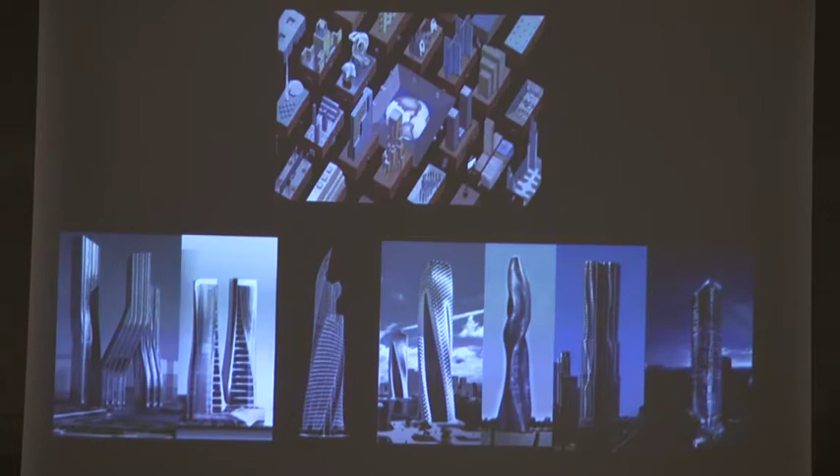We had a short conversation earlier on about Istanbul. Istanbul is now in the construction phase on steroids. Go there, have a look around. You can get a very interesting idea about all sorts of different models of architecture being executed today. Try and see what the qualitative differences are. It's scary, actually.

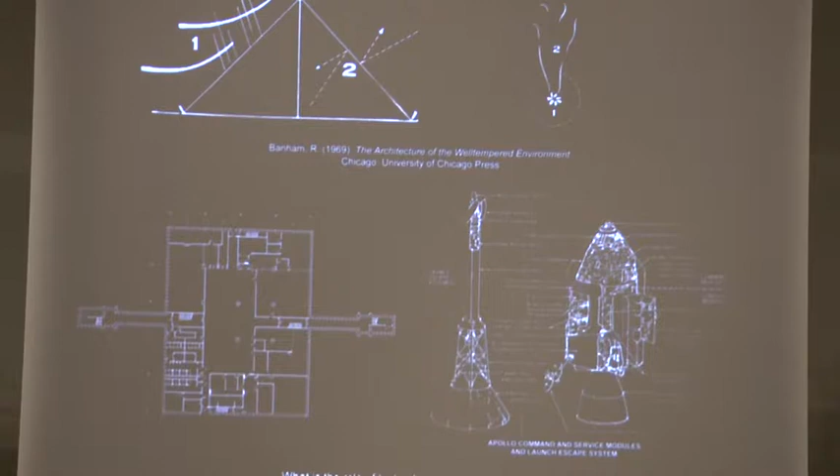Then the question is, if we confront issues such as sustainability and so on, and our tendency to solve such issues technologically, predominantly, why do we do that? Why don't we approach these problems from a spatial and material point of view more predominantly than with technology? One should think technology is what does the last bit that architecture can't do. But today, architecture does a bit and technology does the rest. That is a kind of weird proportioning to me, because I ask them: what do we really do as architects? Do we stuff architecture with technology, or do we try to offset something in the design? How do we do it? And where do these things come from?

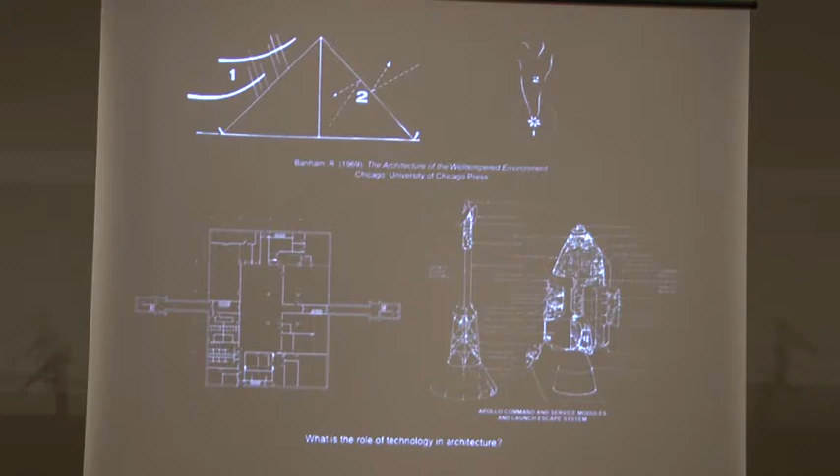Why do we have these very strict singular divisions between interior and exterior that need to be reorchestrated in their exchange with the environment through technology, because it's no longer done spatially?

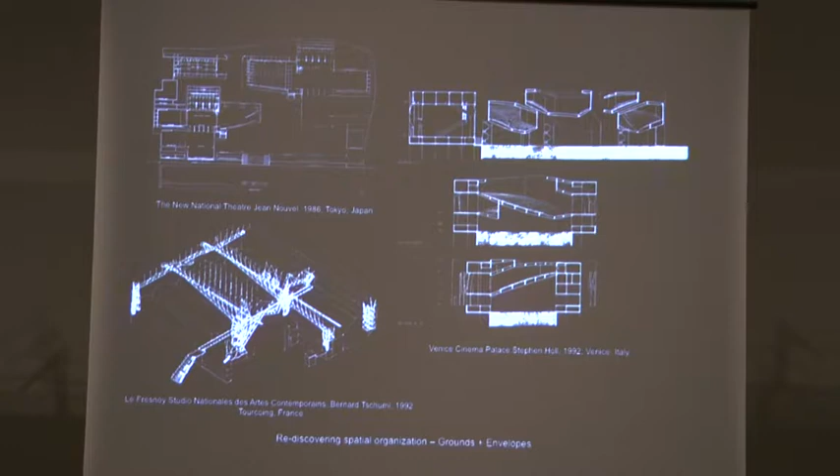But not all is lost. If one looks around, there are always, time and again, very interesting projects that suggest that somehow the core matter of architecture—the spatial material organization, the envelope, the ground, the relation of the building to its immediate context, also meaning the local physical environment—can be thought of in different ways. A lot of architects in their portfolios surely have a number of projects, reasonably less, but still there, that are worth re-examining for this kind of reason and purpose.

So I stepped out of practice around the year 2000. I had enough of it—this kind of Dr. Jekyll, Mr. Hyde, pretending at the AA that we can do all this funky stuff while at the same time not being able to turn this into projects. So I thought maybe a little break from practice, in order then to see how you gradually inchworm your way forward to retain some of the qualities and things that you are interested in.

So I would say most of my collaborative efforts with my colleagues are chiefly placed in the domain of research. There are three contexts in which this takes place: Ocean, a highly interdisciplinary research environment where we do partly very strange things; the Sustainable Environment Association, where we currently analyze 50 case studies of pre-industrial buildings to see how integrated spatial and material solutions could be drawn from there and updated—I'll show some examples in a second; and of course the Research Center for Architecture and Tectonics at the Oslo School of Architecture, where we experiment through construction and, as it were, the simulation of practice in an educational environment.

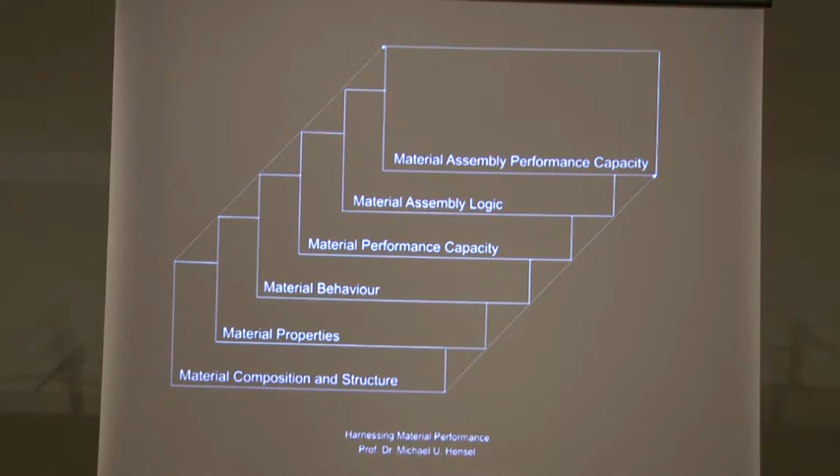Let me first start with material capacities on a smaller scale. It is very obvious to everybody who studies architecture that the properties of a material stem from its composition and structure. And the moment you put a material into a dynamic environment, it will behave - for instance, thermal length changes due to temperature changes and so on. If this behavior was harnessed and put to task for design, then we could talk about material performance.

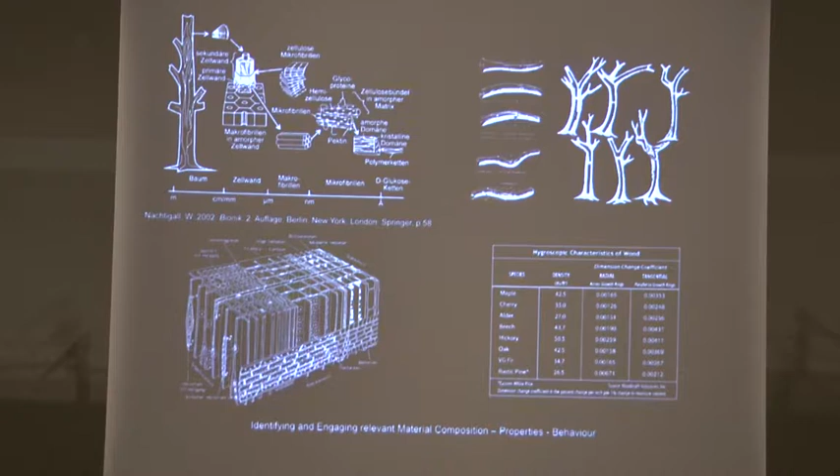But if we take a simple material, or not so simple, like wood, what do we really need to know about this material? How far do we need to go? If you truly want to harness material capacity and material performance, you really need to make yourself quite a range of sources that you need to look at, and they quite often bring together contemporary scientific knowledge and also contemporary fabrication methods, because those methods alter quite drastically materials.

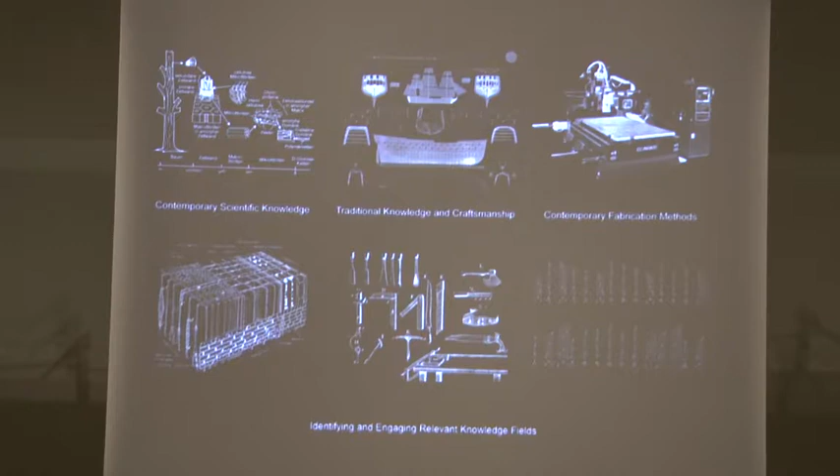If you think, for instance, about using a saw on wood, you destroy the fiber, so something quite radical happens. But there's one thing we should not forget about, and that is traditional knowledge and craftsmanship. For instance, in the case of Norway, where I'm currently working, this is really still an alive tradition, and people there have an incredible knowledge about how you pick one piece of wood versus another for a particular task. Where this knowledge is no longer in existence, the only way forward is extensive experimentation. In other words, you need to work with the material in the field of its behavior that you're interested in.

With materials like wood, you have also the luxury to look a little bit at wooden materials that are natural and how they behave. For instance, the seed pod that cracks open by virtue of moisture loss, which causes a twisting of the two halves of the seed pod that will then crack away from one another. This is caused by fiber directions in layers in opposite directions. So for instance, if you were to make a laminate, instead of saying you need to stabilize the laminate so that it doesn't curve, you do the exact opposite. You wet the laminate and you dry it, it will actually acquire curvature. It will do what wood naturally does, it will twist and warp and do its thing. If you do enough research in this manner, you can do it in a very controlled way. So all of a sudden you don't need to mill, or you don't need to build massive molds or formworks for this kind of panel to have this form.

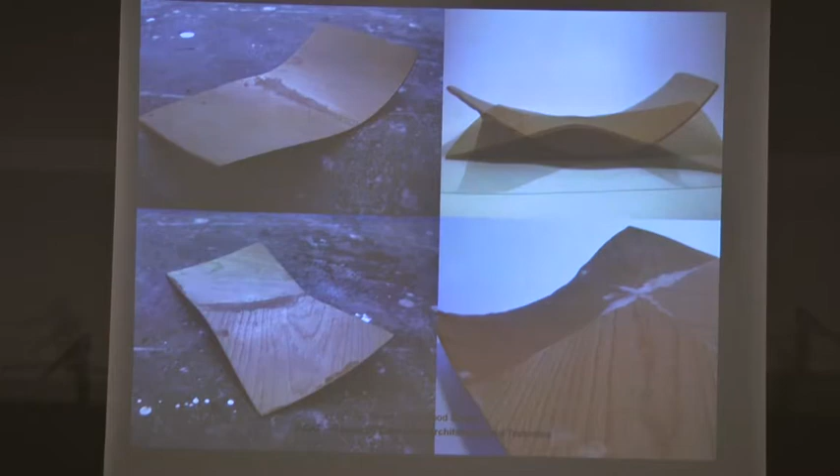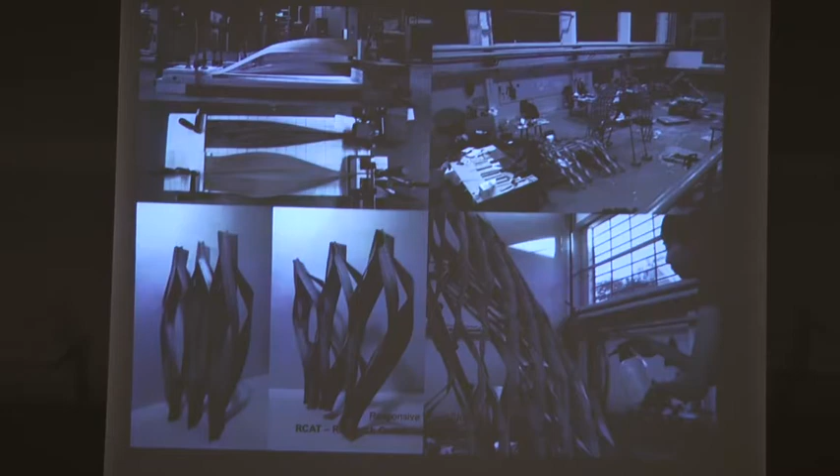So, on the one hand, you want to do enough physical material testing in order to be able to work forward in the digital domain and to produce the construction information. On the other hand, all of a sudden you need to pay attention to other things. If the wood indeed needs to be kept relatively wet during the construction process, you need to see, for instance, when you assemble in the exterior, where the sun is acting the most on that structure, because these are the areas you need to wet the most. So all of a sudden, environmental analysis becomes quite important, also for the assembly process.

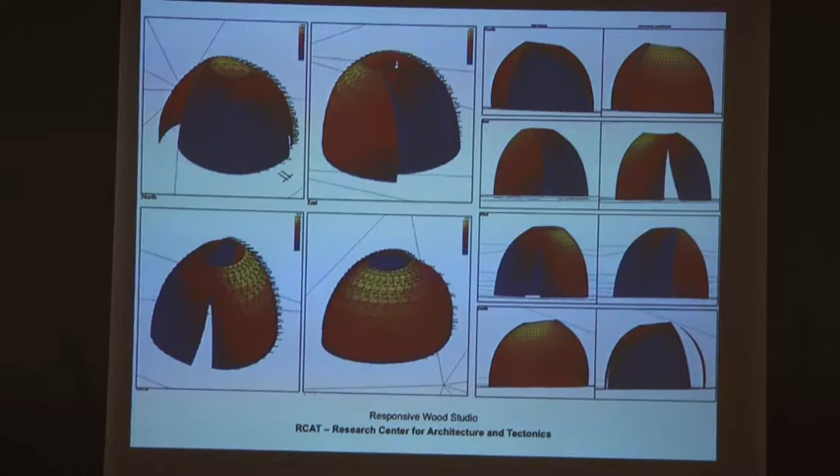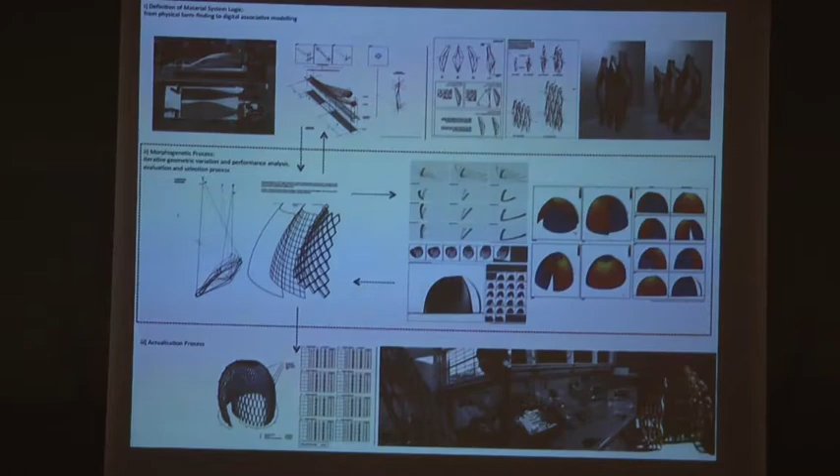I will not pester you with this for too long, because a lot of people are now working in this kind of way. I just wanted to show you one example of what I mean by utilizing material behavior. In fact, it is possible to build a structure out of 0.75 millimeter thin pine veneer due to the fact that the material behaves in drying and pre-tensions the entire structure.

Now, this exchange with the environment in the case of wood is called hygroscopic behavior. Wood seeks for moisture equilibrium with the environment. In other words, if there's greater ambient humidity, the wood will take in this humidity until there's equilibrium, and when it gets more dry outside, it will give that moisture off again. You can see here a photo that my wife took last year. It's a kind of wooden frame in our house that was rained on all night long and then hit the sun the next morning. It's actually quite a visible vapor there.

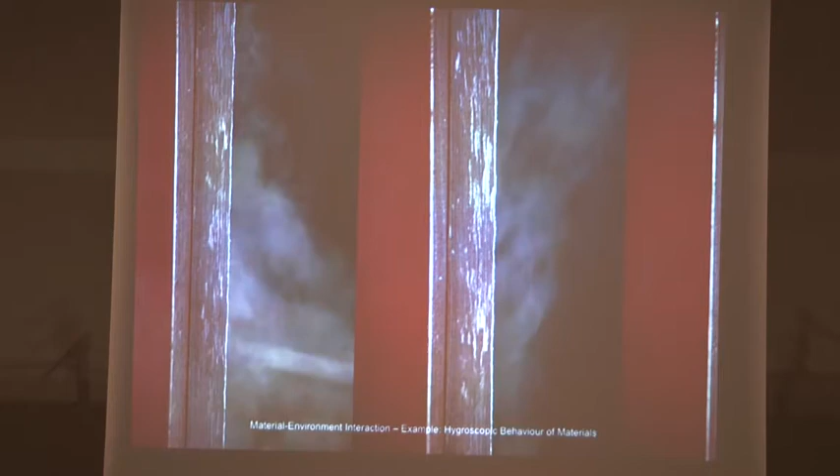That made me think that a blur building can actually be accomplished not necessarily by technological means, but by knowing exactly how you distribute mass and material in the environment. So if you truly want a blur building, of course you have the issue that you may not always have the blur when you want it. It will be there when the moisture is there, but that is a way of getting there. In a way, you can put the material to task.

And maybe here I will just refer one more time to an earlier statement. Why do we first look for a technical solution if, as architects, we should be more inclined to look for a spatial and material solution before we enhance those things that cannot happen in this way with technology?

Now, one thing is also quite interesting in the research that we're doing in Oslo. We have actually realized that we can do any amount of research in the School of Architecture, and yet that research will never make itself out into practice and into the built environment.

Why? First of all, because we can't obtain any great variety of wood, because the two predominant species in Scandinavia today are pine and spruce. So if you want broadleaf wood, you already have some difficulties to acquire it.

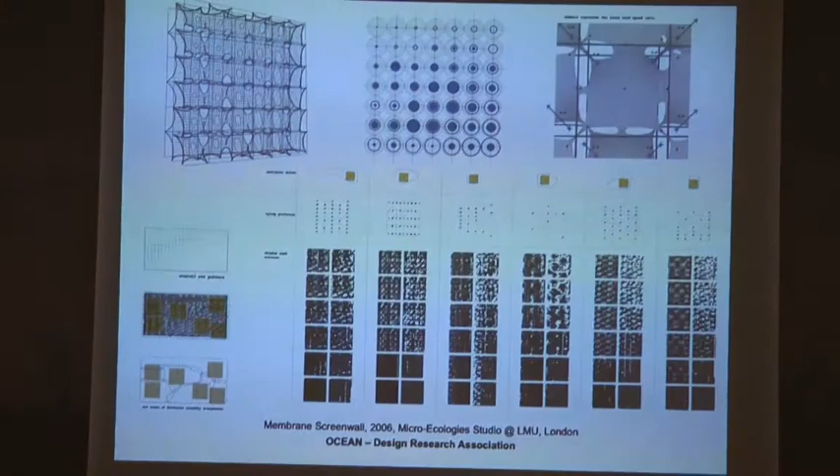The question is, how much enclosure should be provided for an already existing building as an additional envelope? You don't need to put yet another full climate envelope around a building that isn't performing well environmentally. All you need to do is reduce the environmental impact on the building, i.e. the wind force that has a cooling effect on the thermal mass of the building. So you need to identify the environmental criteria you want to affect, and then see how close or open such an additional architecture should be. Plus, there's a consideration of what purpose it serves. But analysis is always critical.

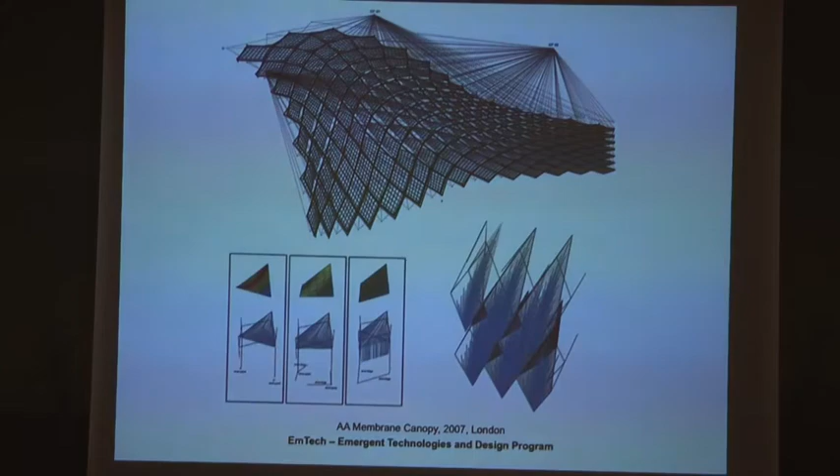Here, for the first time, we tried to link the computational procedures with analytical procedures, to ensure that in such a patchwork roof, the rainwater runs off and that you have sufficient rain cover, that you produce protection in relation to solar impact, and that even though you reduce the horizontal load on the structure, you don't accelerate the airflow between the structures so that the poor people standing there are freezing to bits.

Putting full-scale structures into context has one advantage: things happen that you don't expect, like snow in London. Usually everything stops, but your observation capacity doesn't stop - you can go there and see what happens with something you haven't designed the system for. One realization we had is that we would have to increase the inclination of this roof so that when snow piles up to a certain height, it falls off. Otherwise it will close the surface, receive the full horizontal load from the wind, and probably collapse.

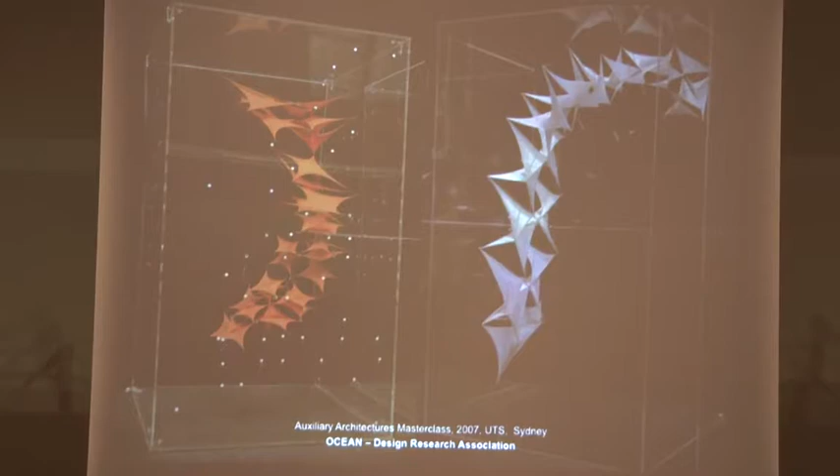So when these systems are developed, they need to be tamed by another system. Here you have two examples. The orange membranes each have their own set of cables connecting to the perspex box around. This space between the perspex box and the membranes is intersected by these cables, so it's not inhabitable. The example on the right has a cable net moving with the membrane system to reduce the amount of cables intersecting the space, making it inhabitable.

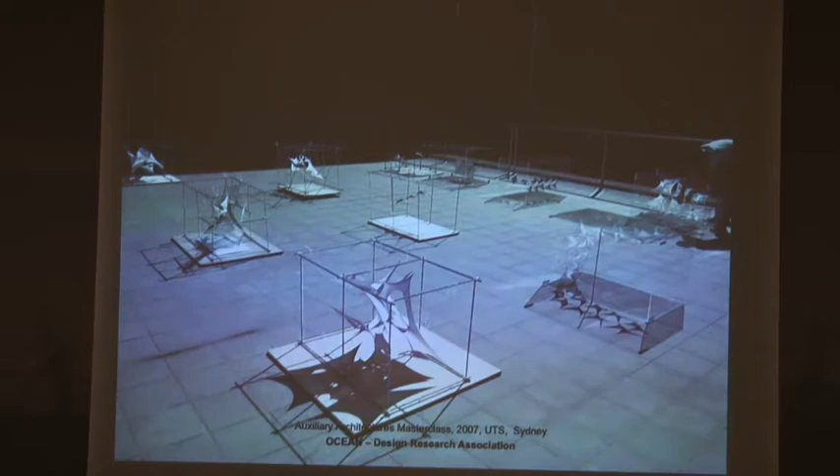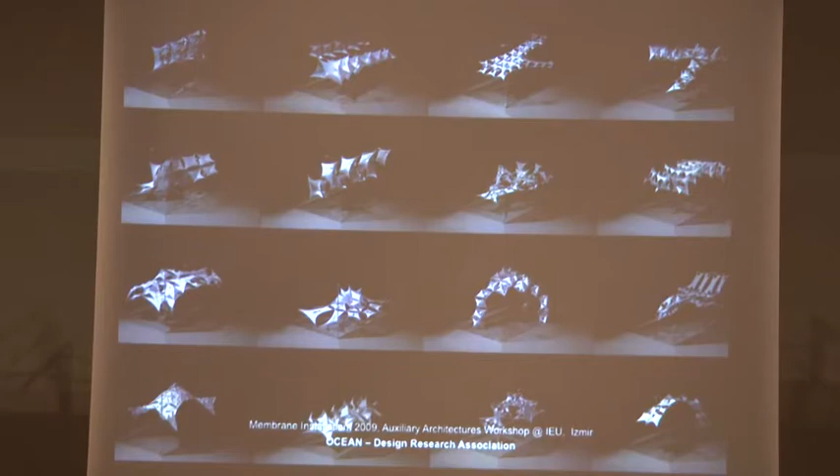Again, at Izmir, where we suddenly had 100 students for 2 weeks, we could go entirely systematic and develop 16 systems that look quite similar if you squint, but are very different up close. We built a prototype here. This prototype was mainly intended to deal with the light condition inside a fairly dull corridor, to shade during the morning hours and amplify the light during the evening hours.

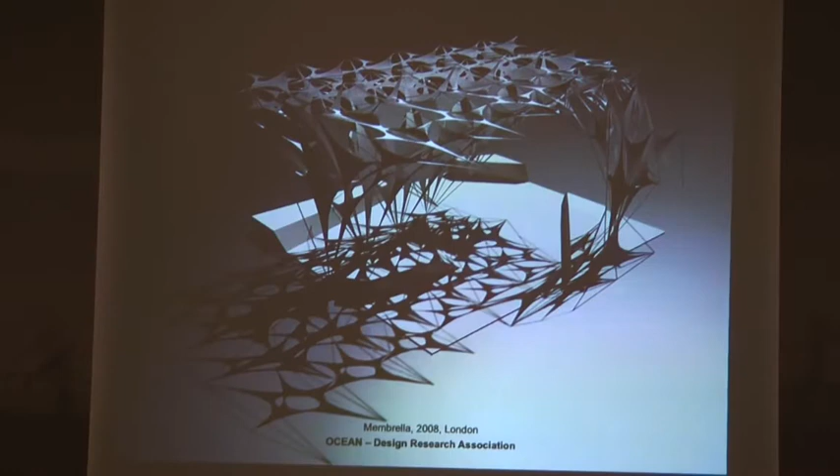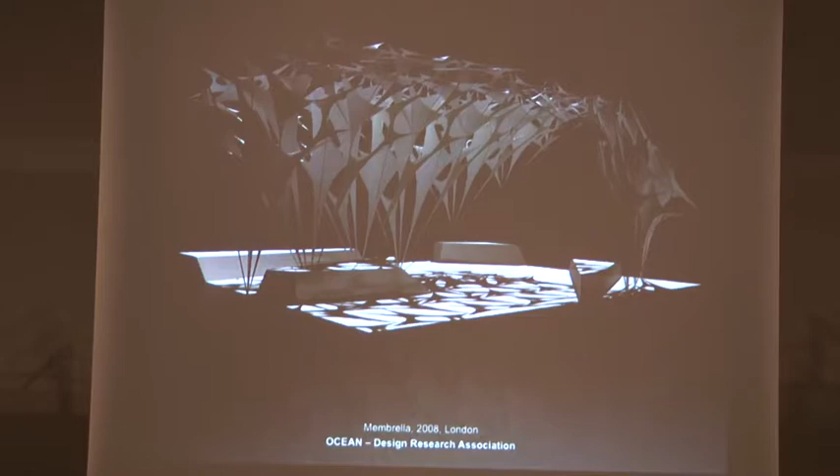Other examples are freestanding structures that could be added where the existing building bulk isn't capable of receiving any tension or compression loads. In London, this was rather precarious because the tension anchors were sitting in the brick surface - not something I would ever want to do again. It's a bit risky.

And here's the project I'll talk a little bit more about later, that we constructed this year in full scale in a very harsh environment.

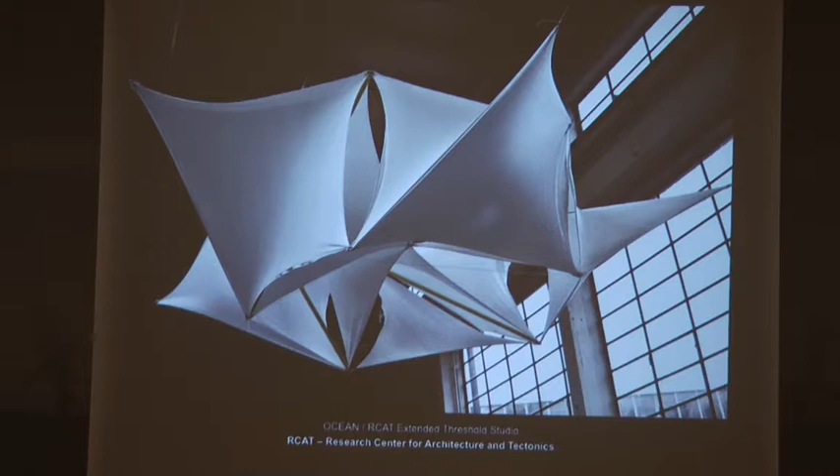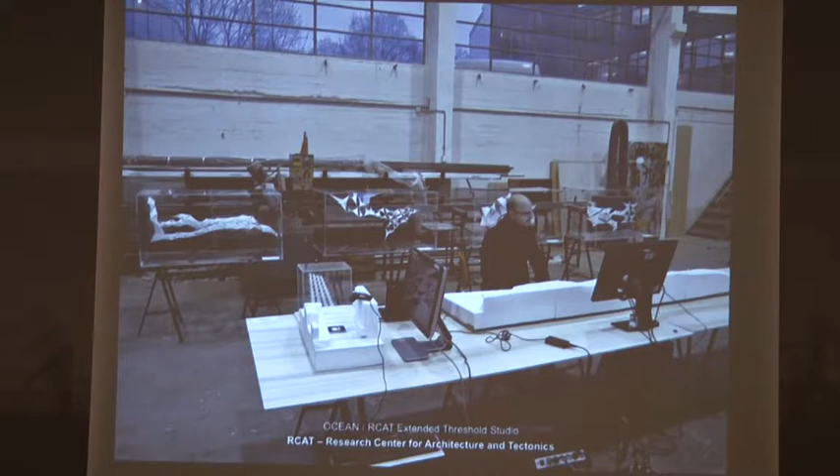Right now we've just completed a studio at the Oslo School of Architecture where we looked at these systems again, and due to weather conditions did our construction experiments in our construction hall. What we're doing too is trying to build the studio so that physical and digital experiments can happen concurrently, so we can simulate things we're not able to construct through augmented reality functions, which help visualize the force flow in the system or the flow of air through the system. Also virtual reality functions allow you to literally move through a design and see it without it necessarily being constructed. It's just part of an extended evaluation process, and aesthetical criteria for evaluation are equally valid as functional criteria.

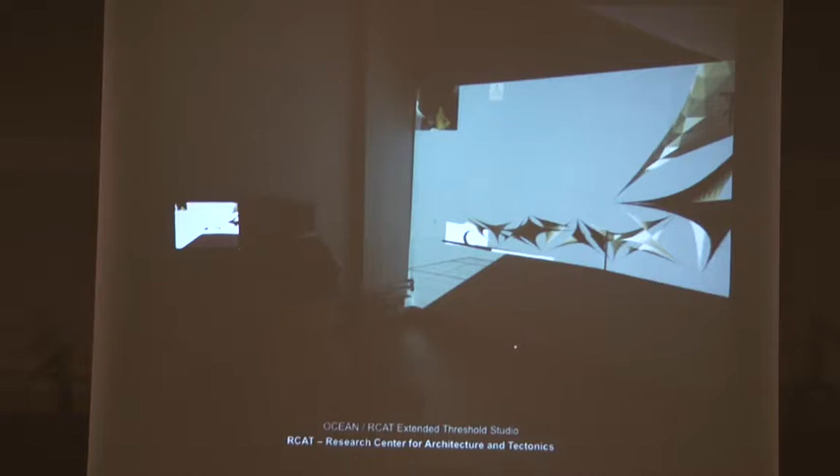This was just a brief excursion into this topic of auxiliary architecture.

The next topic is a research project now going into its third phase: design and construction for difficult environments. What I will show you are a few very modest projects, but in their own right they had to tackle a number of difficult circumstances.

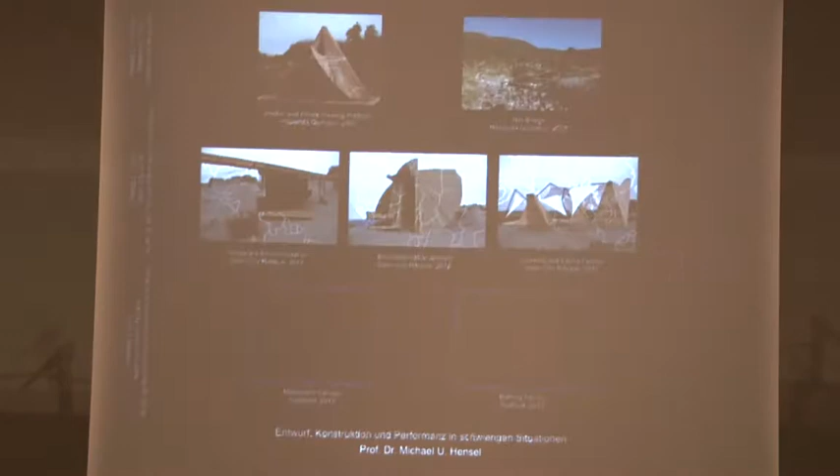The first two phases took place in Chile, the first in Patagonia, the second in the Open City in Ritoque. Now we're planning the third phase for a project in northern Norway that we will do in the spring. Here's a brief overview of the project.

The first project we did in a difficult environment was in Chile, in Patagonia, and the brief was actually very simple and not very demanding. It was merely a shelter and a viewing platform for a fjord-like bay where you could do some whale watching.

However, the structure was to be implemented in such a manner that you would disturb the ground at the very least. This is a very pristine nature site, where all the material, at least in terms of wood, would come from the site. No live trees could be cut, so we had to consider only cutting trees where there had been a forest fire and floating them down the river. The length of the trunk was determined by the bends in the river used to float these trees down.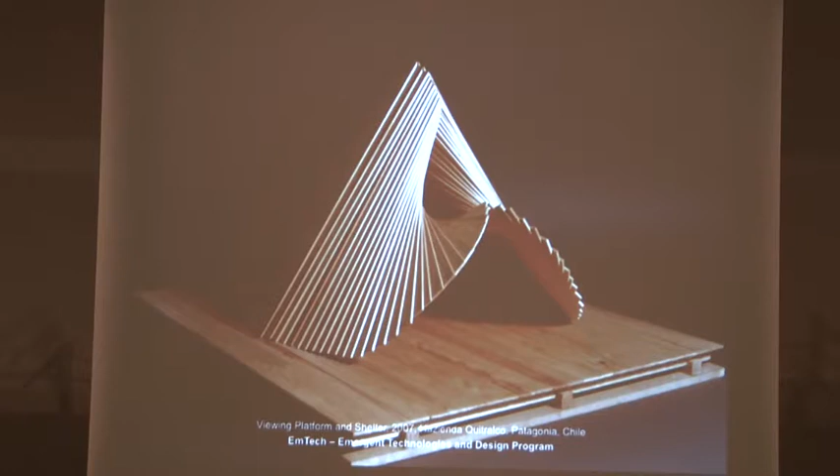Earthquakes, of course, and high wind loads along the Pacific coast, particularly in winter, were concerns. In the design phase, we had to work very hard with Buro Happold to figure out how this elaboration of a fairly simple geometry, consisting nearly entirely of planks of a given length, would be stable or not under the impact of an earthquake. We also had to do a fairly extensive airflow analysis to consider how the horizontal loads would act on the structure.

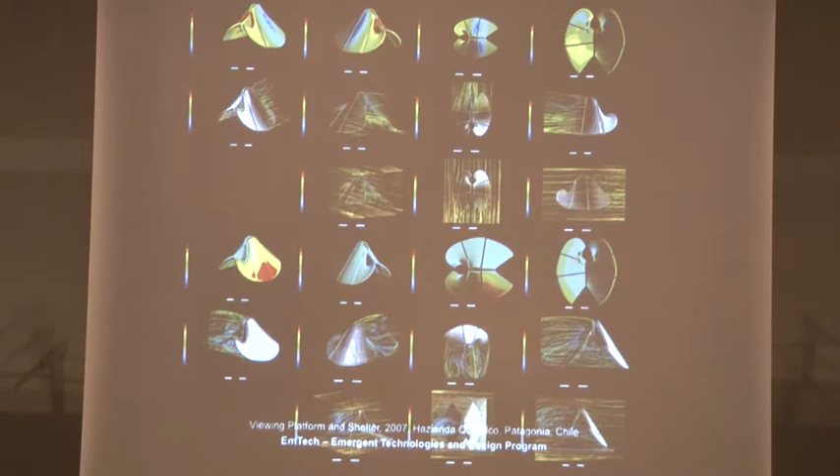An additional difficulty was that construction had to take place in 7 days, and all the material and tools required had to be taken on a very small sailing boat to the site. So down to the last nail, in a way, even though this was a very small project, the considerations had to be fairly specific.

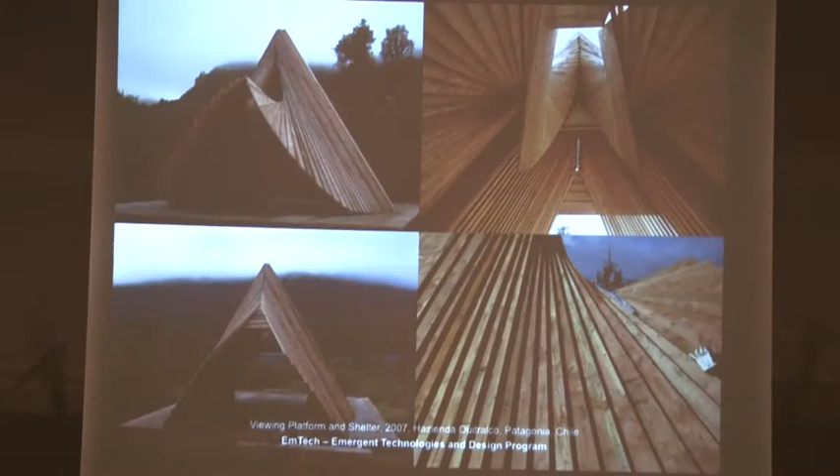So we had to come up with a system that allows a kind of free disposition of the pylons within certain limits on site. After our test digs, we were able to determine the precise locations of the pylons and then build the bridge. So one of the difficulties here was really building in the unknown.

Basically, designing for a condition that is critical but not known at the point where the design needs to be determined.

Then very briefly, 3 projects that we completed this year in the Open City. The Open City, you probably know, in Ritoque, is a very fantastic educational experiment by the Catholic University in Valparaiso.

They commissioned, somewhere in the early 1970s, Alberto Cruz, a very important Chilean architect, to rewrite the curriculum for the education of architects at the university, with the main question being: what is the architecture of South America? Not an easy task to address.

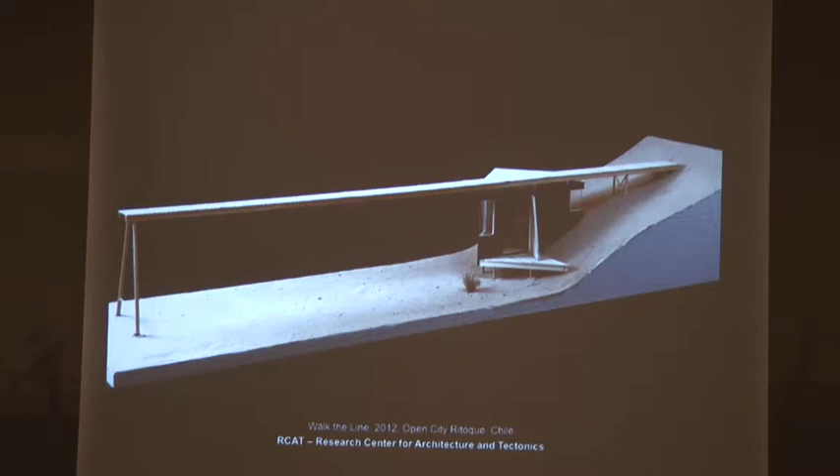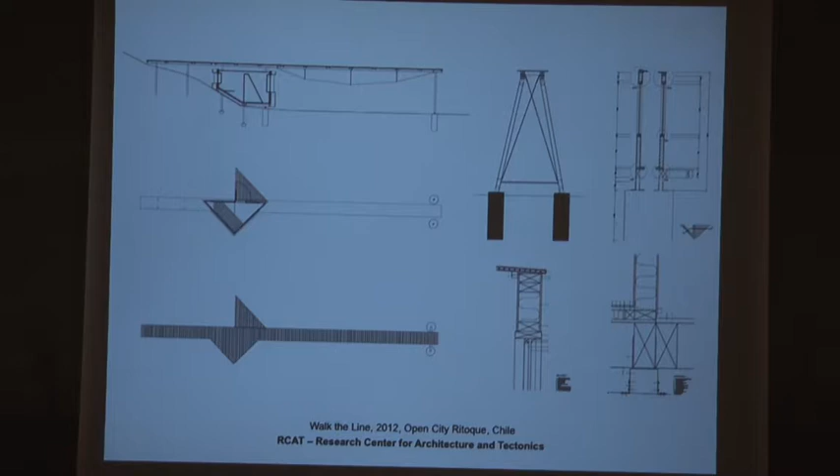Construction on site. That studio was dealing with issues of scarcity on top of everything else. So what kind of materials can you actually purchase for the minor budget that we had for this kind of construction, and are those materials provided in such a way that you can justify working with them environmentally.

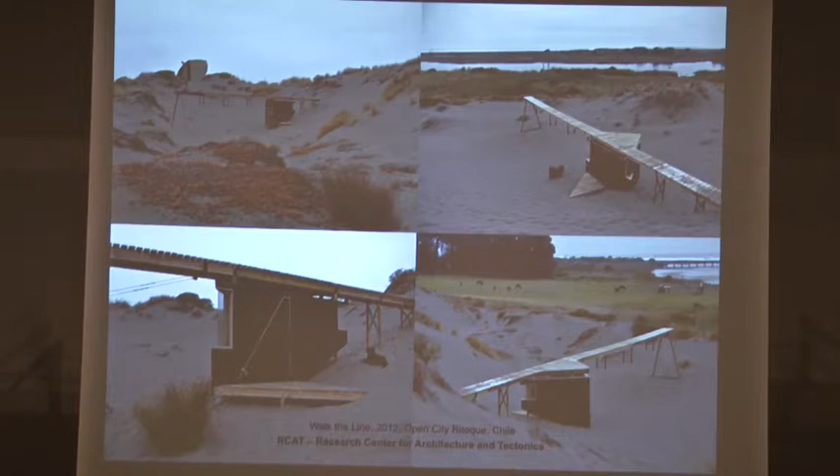So, a finished project. Unfortunately, I cannot show you any photos of what happened since - I'm still waiting to receive them myself. Either it was a full catastrophe and the guys are embarrassed to send us the photos, or I don't know, maybe they're just a bit slow.

The second project shares some features with the first one I showed in Patagonia. It is again a ruled surface project, but this time one that is open and see-through from two sides and closed from two others. It's a bird observation point right next to the bird reserve and the estuary of the river that cuts across the site.

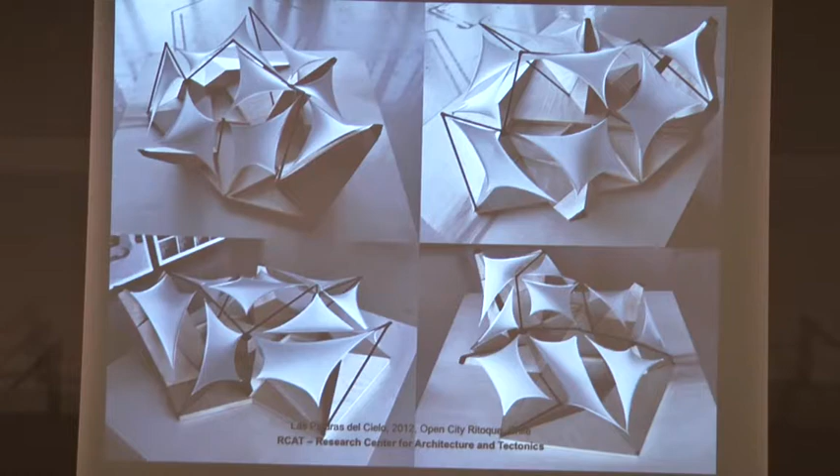But this project I wanted to talk a little bit more about. This is a facility that has some enclosures for cooking and food preparation, and then this kind of sheltered eating place. So it's a project that is not necessarily auxiliary to another architecture, but is auxiliary to the dune landscape in which it was supposed to be placed.

I'm not going too much into the development of this project, but what's really quite interesting is when you look at the force distribution, we have 21 point foundations on that side, all to be set into the sand. But almost every one of them experiences a different set of force combinations. Some are pure tension, some are pure compression, some alternate between compression and tension depending on the horizontal loads, and some have tension and compression at the same time.

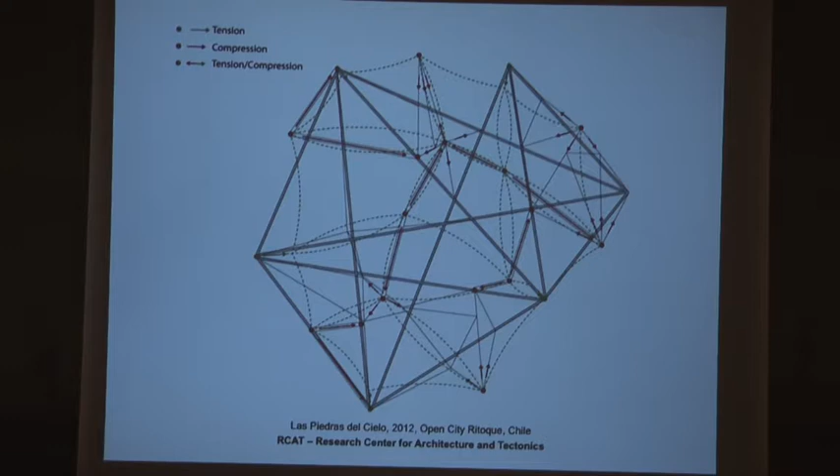So it was not really easy to work through a small project of that sort, making sure that the high forces that act on it, and particularly the membranes, which seem counterintuitive in this context, would work. Again, a lot of analysis was necessary to ensure that the project would at least not fly away with the first little breeze.

The construction project and the finished project. One issue we realized only on site, simply because we should have had more extended conversations about materials - there's a real problem with steel in this environment, and it's not just the obvious sea salt that eats away at the steel, but there's a copper smelting plant nearby, which massively increases the acidity of the moisture particles in the air.

So you can say even stainless steel is gone after 7 years, and galvanized steel maybe 3 years if you're lucky. For lack of budget, we had to do this project all with galvanized steel, so it doesn't have a very long lifespan. We were also told that in this particular part of the site, poorer people from the area scavenge for firewood, so I'd imagine a lot of this would have already warmed some cold hearts.

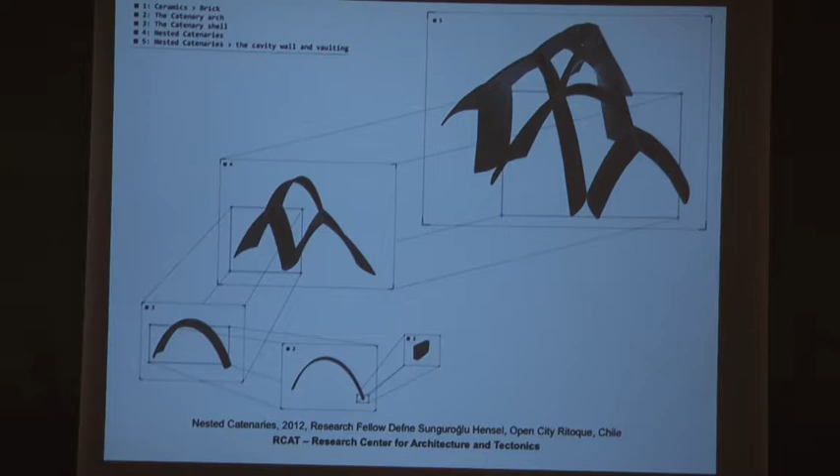So this is the system hierarchy from the brick to the arch, to the shell, to the interacting shells, and then this kind of dome structure. In order to handle this, we had to work with Boma and Passer, one of the best engineering companies in Barcelona.

They did pretty much everything from the Torre Agbar to all sorts of other projects in Barcelona, the Bullring Center, and so on. First, it started with assessing singular arches and their geometry through the modification to see the stress pattern. It went on to combinations of arches, and finally the construction.

But of course, the brick that you can obtain in Chile does by no means have the same standards as the engineered bricks here, on the basis of which this was calculated. But nevertheless, the important thing was to find someone who knows something about calibrating the relationship between the brick and the mortar in such a way that their elasticity is in tune.

And so I have been told that since we left, there have been about 15 or so earthquakes above 6 on the Richter scale, and the structure still stands. So now we can move forward with this and try to see whether we are able to produce enclosure. If you want to close the edges with a brittle material, say for instance with glass, everything becomes a question of the edge stiffness of these shells under, for instance, earthquake impact or other kinds of loading scenarios.

Okay, you're still waiting for some big architecture, but I'm kind of just moving around it. I'm not going to show you any kind of big architecture design class today.

But out of a conversation we had recently with the chief editor of ARCH+ Journal, Sabine Kraft, she suggested that it would be quite interesting to look at architectural history again, but not from a style or typology perspective, but from a performance perspective.

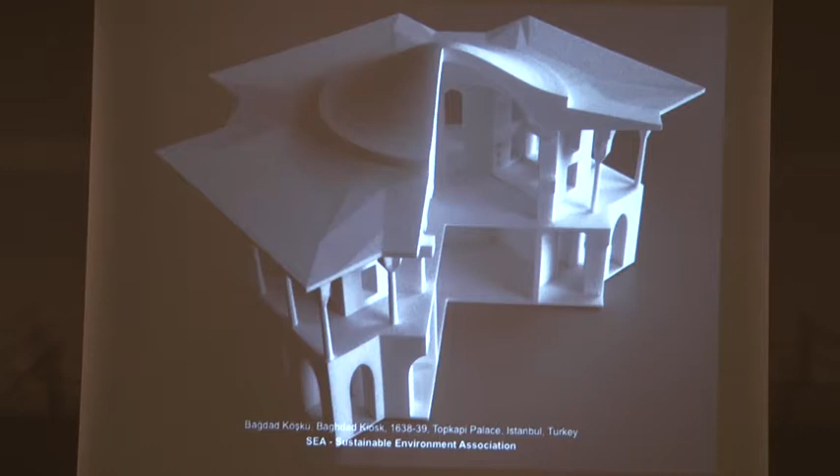So, of course, we first model these kinds of projects. We look into them, also we make scaled physical models of them. We study the plans and sections. Here you can see quite clearly this meandering wall, and if you imagine now a particular sun path and a particular prevailing wind direction, you can quite easily imagine that each one of these pockets is quite different on the interior and on that secondary arcaded space on the exterior.

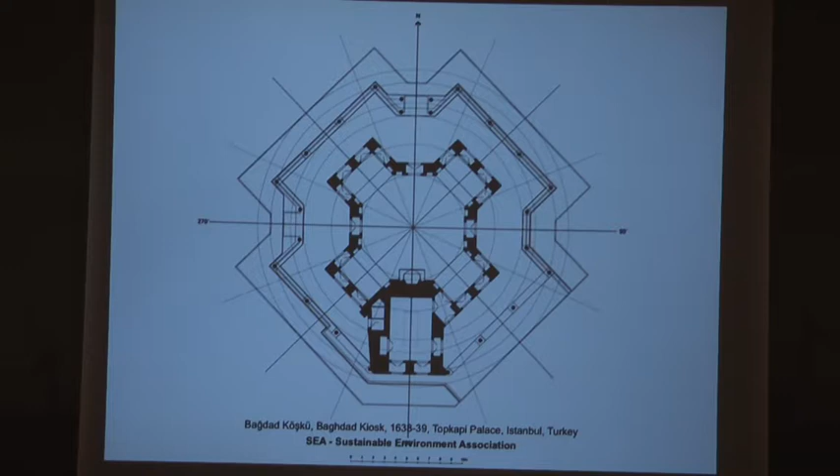In some places you get more sun, in some places less. In some places you get more wind, in some places less. And so you don't tune some sort of air conditioning unit, you just move a few meters until you're comfortable. But the question is how, if and how they were able to fine-tune this so that there's always some range of comfort zone around it. And in some of the instances of the projects where the people that have designed or maintained these buildings are no longer there to ask, we need to do a lot of analysis to figure it out.

Similar to this kiosk in the center of this little forest is the Fin Garden kiosk, built at the same time in Iran, but with a totally different spatial organization. The four innermost spaces are on the corners of the building, and the building is transected by two axes of external space, so all of a sudden you have much more exterior surface.

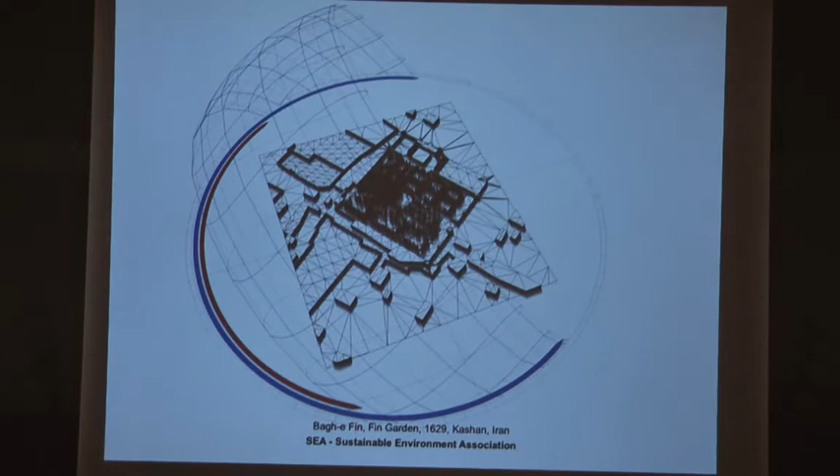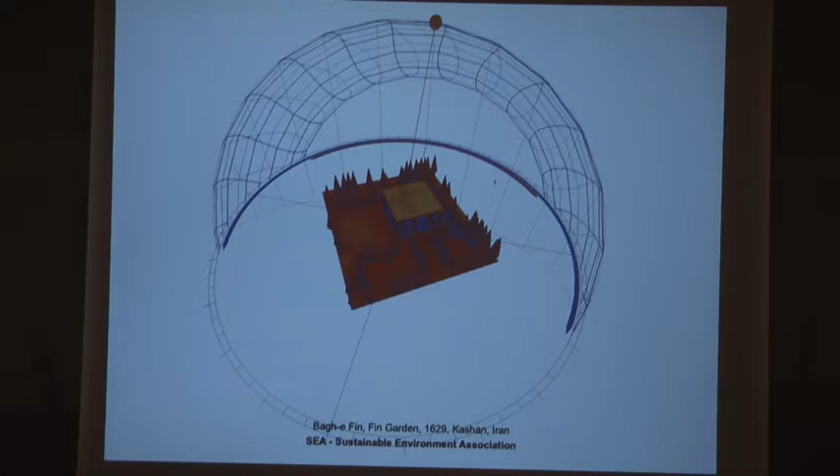Now I want to speak for two minutes about two different types of visualization.

What we're doing here, these 50 case studies, are not only intended for architects. The intention is to exhibit these buildings and draw the general public back into an interest in architecture, and to show that historical architectures were not despicable slums, but that they were actually quite nicely thought through.

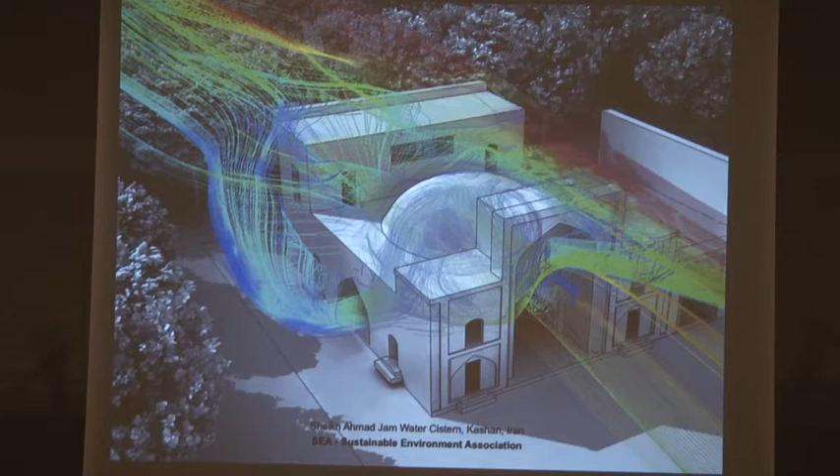Similarly with this water system, also in Iran. If you have water that is to some extent open to ventilation by air, how do you keep that from being contaminated? It's a very important question. It's also a question about the temperature of the water body, so that any contaminants that may actually end up on the top surface of the water are not able to spread.

Or a very intriguing typology: ice houses, typically built in the desert. What is done there is ice is produced overnight, and it is stored in a dome of this kind of sort. Here you see a little section in the plan of this.

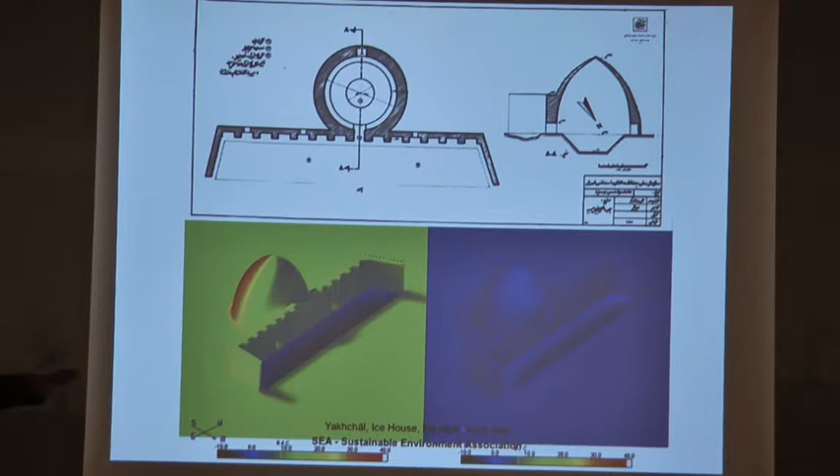But how is ice produced? There's a water pool here, about a meter deep, surrounded on three sides by a wall, and then of course the storage facility behind. Now the first thing that obviously needs to be done, because you're in the desert, is keep the pool from heating up during the daytime. So this is a thermal analysis that shows you the average thermal impact over a day on that kind of surface. You see that due to its orientation and its three-sided protection, the water pool is not affected.

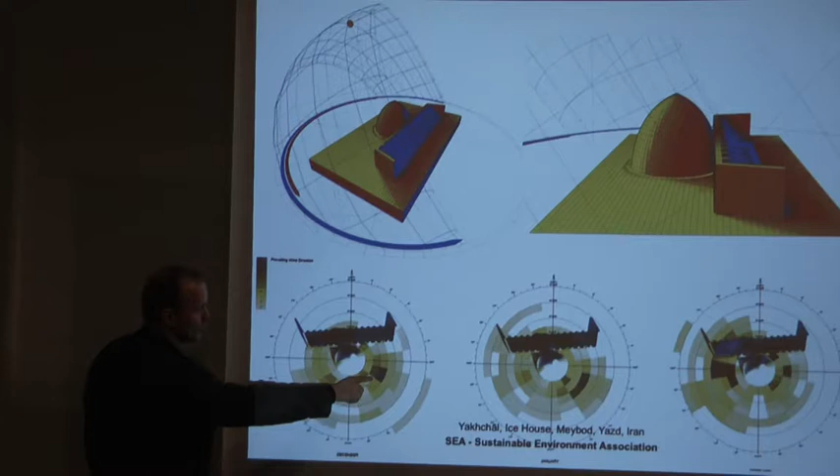Look at the sun path - we see a similar kind of position. And if you look at the analysis of the prevailing wind directions, you see again that the wall shelters the pool.

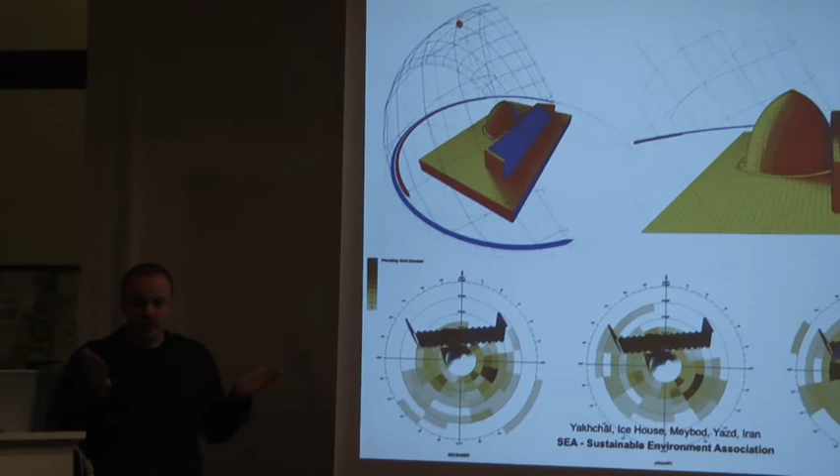So the pool is not warmed up by the sun and the wind, but how is the ice produced? That's an interesting question, and the answer is fairly simple: it's radiative cooling to the night sky, it's heat loss to the night sky. It is so effective that several centimeters of ice are produced in this pool every night.

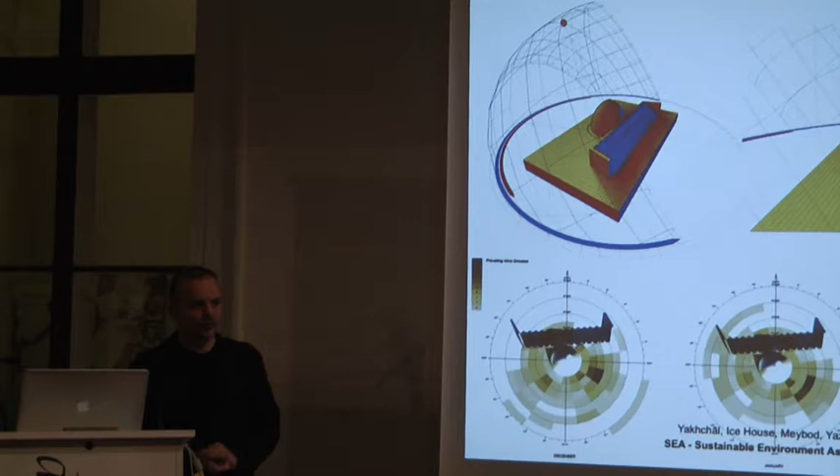So an interesting question is, when it comes to maintenance of these buildings - and believe me, there's nobody around you could possibly ask about this, these people are not there anymore, and these buildings are not used anymore - you need to make a quick analysis about how much ice is produced under certain circumstances over 24 hours.

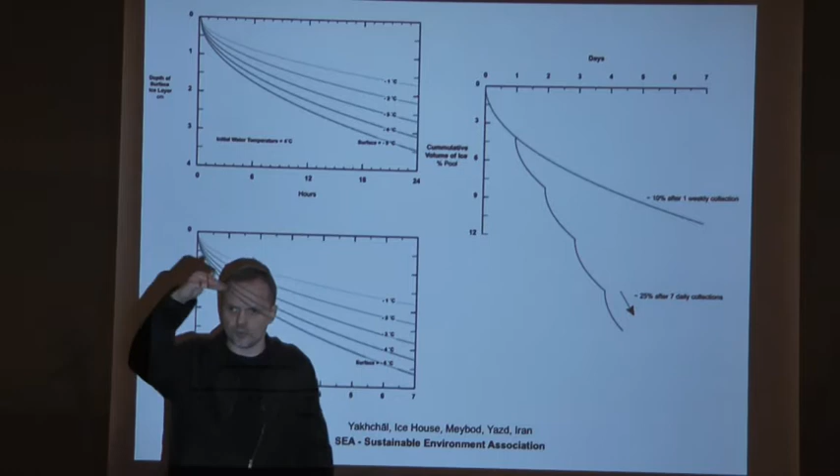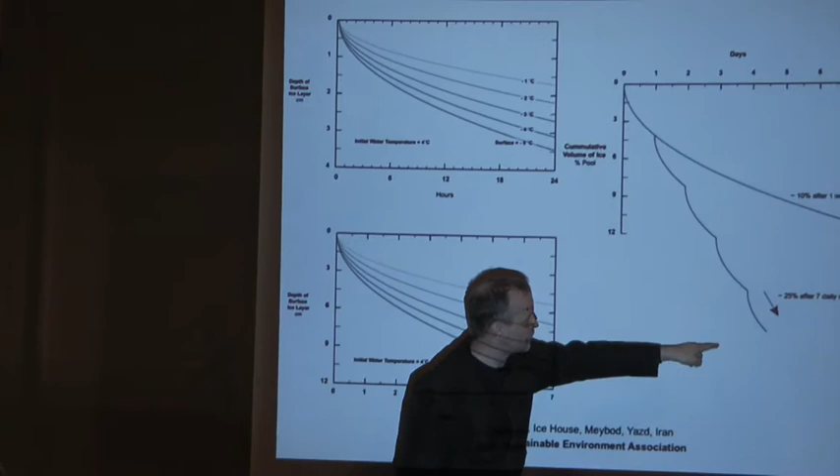So here you see two interesting curves. The more shallow curve indicates harvesting only once a week, and you see this curve becoming more flat in terms of the depth of the ice produced. That is merely due to a very simple condition: the thicker the ice gets, the more it shields from radiative cooling, so it gets slower and slower. But if you were to harvest at an interval of one day, you see that after seven days you have probably more than twice as much ice produced.

Then something completely different, the pigeon tower. These typologies are built to house up to 10,000 semi-wild pigeons, kept to harvest their droppings as fertilizer for the fields and for use in tanneries for working with leather.

How do you design for pigeons? A particularly awkward client—you cannot talk too much with them. Are you comfortable, guys? So how do you do this? One part of the answer is simple: very obviously, this typology comes out of the vernacular tradition.

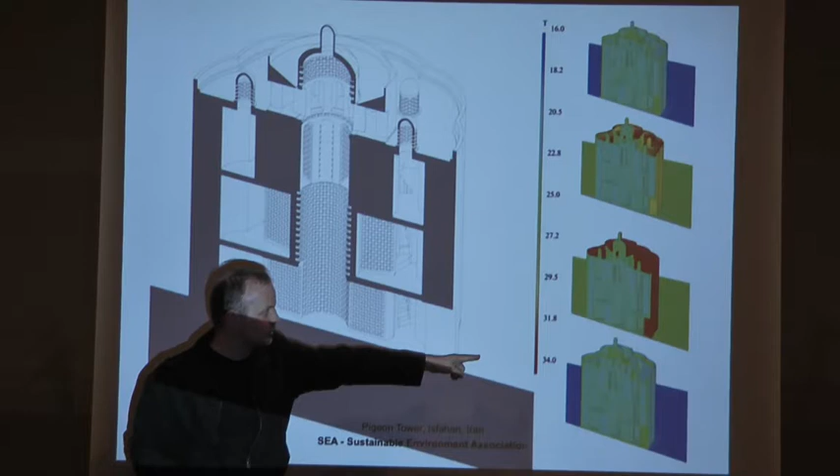Now, how do you make something comfortable for pigeons? First of all, it's a question of thermal impact. The available building material is adobe—very thick walls, needed because of earthquake impact in Iran, but also to reduce thermal impact. Here you can see, on the hottest day of the year, at four different times of the day, the outside of the building heats up to 34 degrees centigrade, but the interior remains constant at around 20 degrees centigrade.

This is surprising when you see that these towers also act in a similar way to the famous wind catchers in Iran. There's a lot of effective ventilation into this building for air exchange, because with all these pigeon droppings, which are only harvested once a year, the air can get fairly lousy in there.

I've been told by people that these towers still stink today, even though there are no droppings anymore. But the real point is: how do you get the velocity of the airstream along the cooling or warming surface so well modulated that you keep the interior constant? They did it without any computational analysis. We have to do computational analysis, and ask all sorts of experts what the pertinent questions are in order to learn something from that.

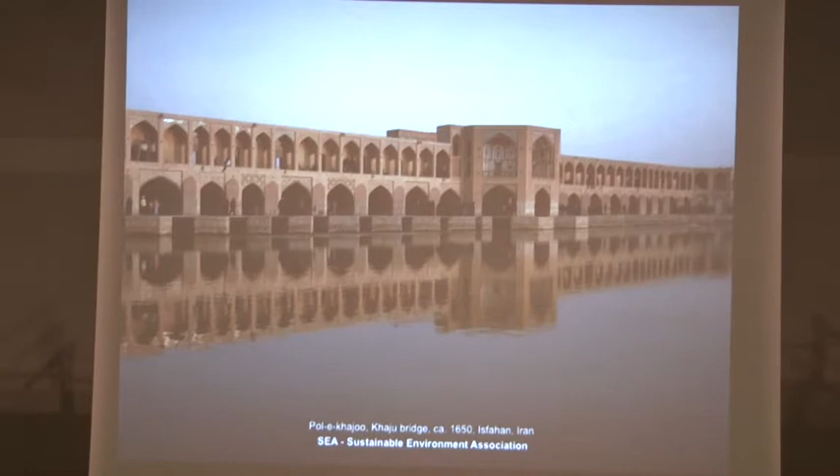As a final quick example, I promised to show you a more sophisticated bridge that does several things at the same time. This is the Khaju Bridge, again in Isfahan. And here we come to the question of knowledge production—I'll get to that, because this bridge, in its combination of functions, has a precedent.

That became enriched by additional thinking and by gradually increasing the size of the project. This one is very different. First of all, on the upper deck, the bridge connects the two sides of the city—nothing much about that. On the lower deck, it is the weir with sluice gates, regulating the water level of the river upstream so that the gardens can be supplied with irrigation.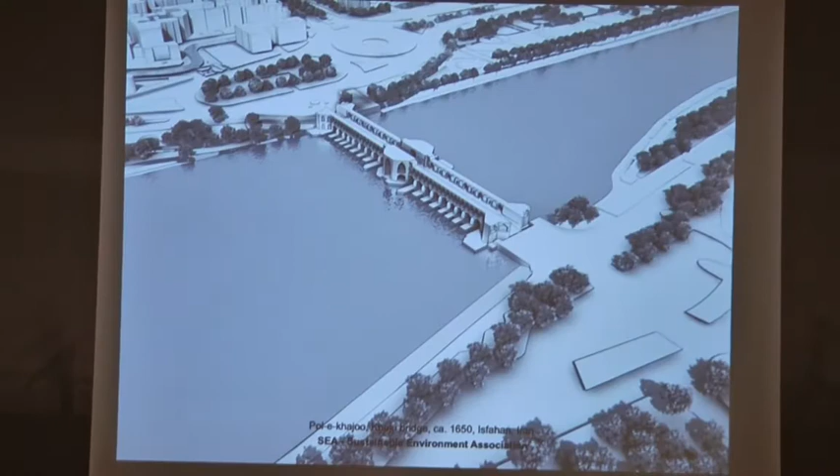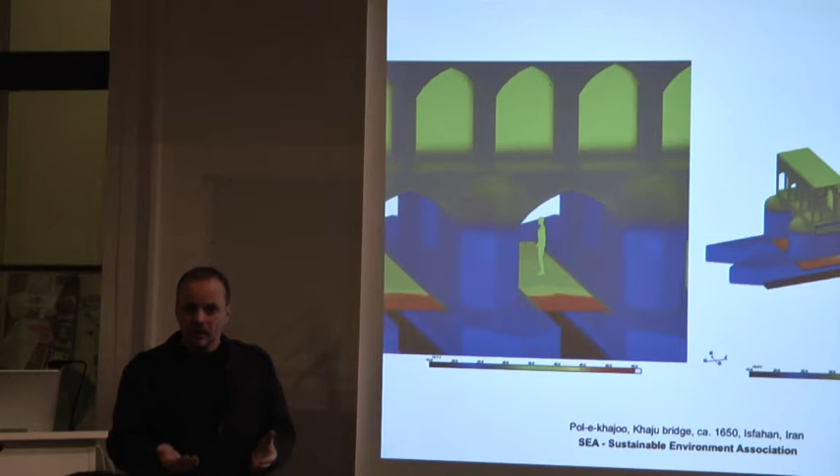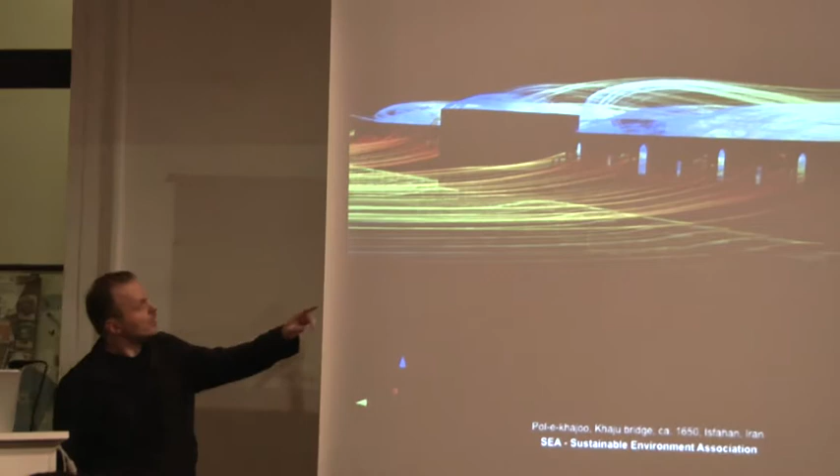But there's something else rather astonishing about the bridge. People congregate at the lower part because it's very comfortable, climatically speaking. The reason is that the air streaming through these voided spaces circulates over the water body, and evaporative cooling makes this air very comfortable. In other words, this place is a social condenser that the Shah provides for his people. Here in the center of the bridge, this dark block is actually a small kiosk, like a pavilion, symbolizing the presence of the Shah providing for his people.

If you look at it analytically, there's something rather interesting happening—not only that you have a lot of turbulent flow, with air circulating over the cold water body and cooling the place, but it's also slowed down so that when you sit there, you don't feel an uncomfortable cold airstream. It's a kind of double coordination that is really astonishing, considering there was really no precedent. They built this thing and it worked.

So, how about knowledge production? How do these cases come into existence? One obvious logical consideration is that the component parts are known and elaborated. Yes, there are other bridges that were weirs with sluice gates, and other bridges which are bridges. They have a long tradition of knowing how to deal with airflow in vertical structures, not necessarily in horizontal structures. So yes, it could simply be a kind of juxtaposition of existing forms of knowledge, but then how do they get it right so much? I think it's always quite interesting to see what actually happened historically at that very moment in time.

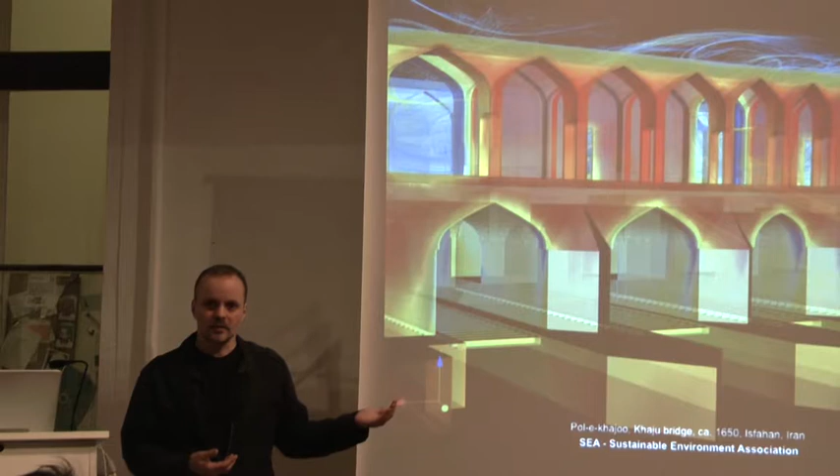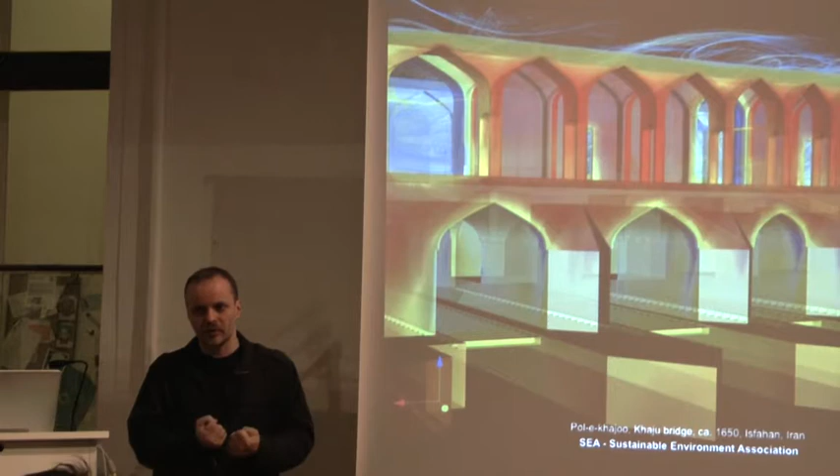To my mind, this is the best indicator that our preference today for interdisciplinary work is right. It's really going in the right direction. We have to bring knowledge fields together for something interesting, new, more sophisticated to happen.

But I owe you still a few statements about two things. The first is the question of the local physical environment, in particular the climate. One of the problems we have in Norway is that all the building regulations and standards are based on one collection point of climatic data in Norway — near the old airport in Fornebu in the south of Norway. This is then multiplied by a factor to make up for the fact that buildings in the north are much more exposed. But this uniform regulation is used everywhere else, which means that in a lot of locations you put vast amounts of materials without need. So how fine should a set of measurements be, and can you really account for local climatic differentiation?

Where we live, outside of Oslo, between our valley and the neighboring valley, it can be up to 10 degrees centigrade temperature difference at the same time of day, at a distance of 1 kilometer. The reason is our neighboring valley is a cold trap, while in our valley the weather moves through. In that cold trap, cold air from the north comes in and is basically captured and just sticks around there. So when I drive by car in the morning, it might be -5 in our place, but a kilometer further it's -15.

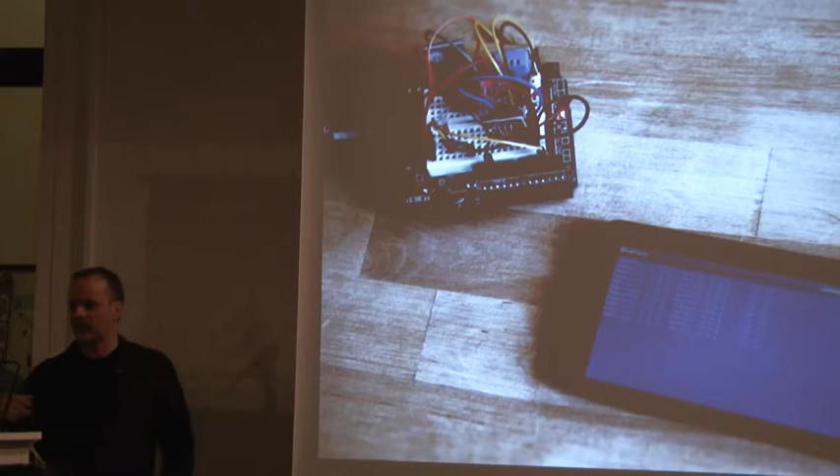So if we look at the way we're working computationally and otherwise today, we have these iterative processes between form generation and analysis. What does it mean to feed real-time data, maybe weather, maybe seismic or otherwise, into the process? We don't know yet.

The other question, I showed some images earlier, has to do with augmented reality and virtual reality immersive visualization - in other words, to facilitate students and non-experts with the possibility of understanding what it really is they're looking at. Because when you look at the typical analytical drawings of engineers, it takes a level of expertise to understand what it really is.

So communication of such complex issues is important. And then lastly, this is the last theme I want to address for today: the question of the pigeons and the pigeon towers. Architecture and ecologies towards an anthropocentric architecture - what does that mean?

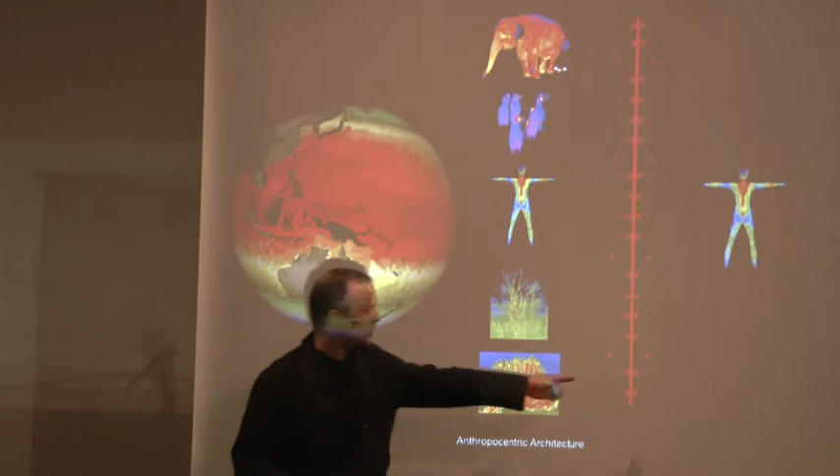For instance, a simple example seen a lot in England these days: old rural buildings where the cold roof is transformed into an insulated roof - bats, pest control, who knows. This shows that more and more structures are centrally focused on the needs of humans, and no longer possible to inhabit or appropriate by any other species.

So what if that intervention, this material and spatial intervention, became more spatial, so that it produces intermediate zones and pockets where those bats could still be, in spite of the cold roof having turned into fully insulated and climate-controlled space? Is such a thing thinkable?

And why is it necessary? Well, urban ecologists have made quite a bit of progress with putting policies and actions into place, but if architecture cannot sustain it because of its insistence on a different kind of focus, then we have a problem. On the large scale, something is supposed to happen, but the large scale is an agglomeration of a lot of small scale things, and these small scale things don't take any action in that direction. Then what?

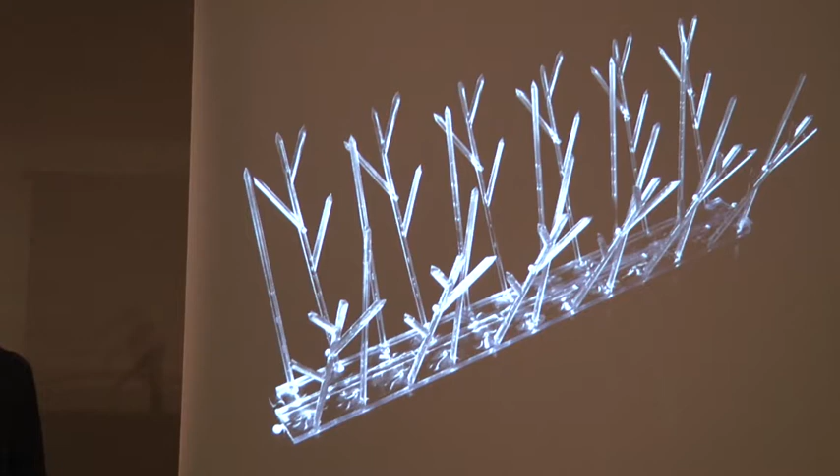It is, in fact, quite interesting for architecture students to engage for once in the study of an ecosystem, to understand what kind of relations are taking place there. Systemically speaking, these relations are very different from the ones we tend to work with in architecture, mainly because we construct things as a product that is given over and has its own life. But no such thing here. So how do you even need to visualize such kinds of relations? To which extent do you need to look into plant morphologies, or the morphologies of certain species, into their physiology, into food chains, etc.?

On the other hand, back to urban ecology, there are now more and more efforts, at least in Europe and also in the United States, to map out local biodiversity. There are research groups, governmentally funded mostly, springing up everywhere, where a succinct effort is made to quickly register what is there before it's so modified that it's meaningless to map biodiversity.

So as a model for architects, because we plan things and coordinate things, it's quite interesting to look at a field called agroecosystem management, where on the one hand the farmer plans a biodiversity, what kind of crop cycle, in order not to exhaust the ground and so on. But with making these decisions, something else happens: an associated biodiversity. If you plant crop A, you will have bacteria B and C in the ground as a consequence. The associated biodiversity is a consequence of the planned biodiversity.

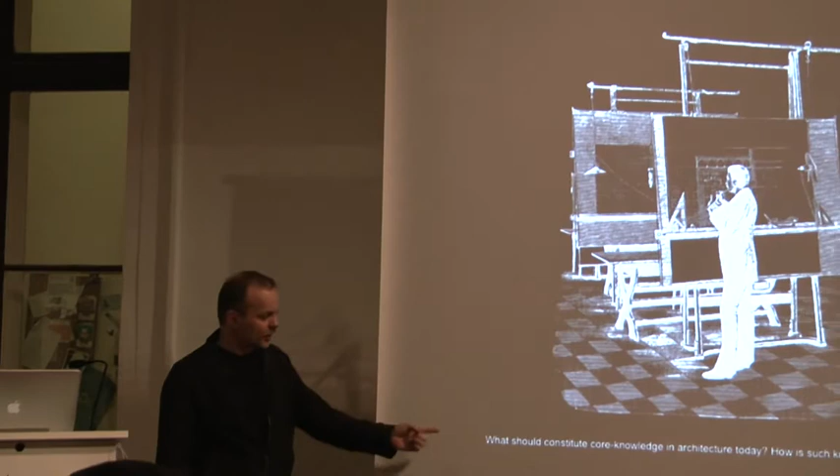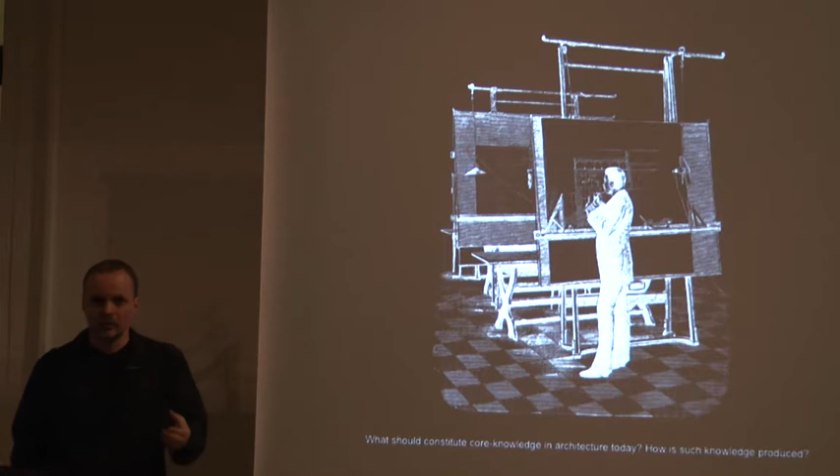Finally, I cannot answer the question that I started with: what should constitute core knowledge in architecture today? How is such core knowledge produced? But we're pursuing a number of avenues that I was talking about here, that are all placed around somehow what is common practice in architecture, and that would inform that. I don't want to say that we can do better everyday architecture - we, as in my research environment with the people I collaborate with, surely we cannot. But we can probably help enrich it with a number of questions that will shed light on what kind of expertise we might need to gain.

In some instances, you don't have to become an expert in ecology, but you need to know some first principles. In some instances, you don't need to become an expert in climatology, but you need to know some first principles, and so on. So how do you actually make that judgment - as a student, as an educator, as a researcher - where you should invest that time and do this kind of thing.

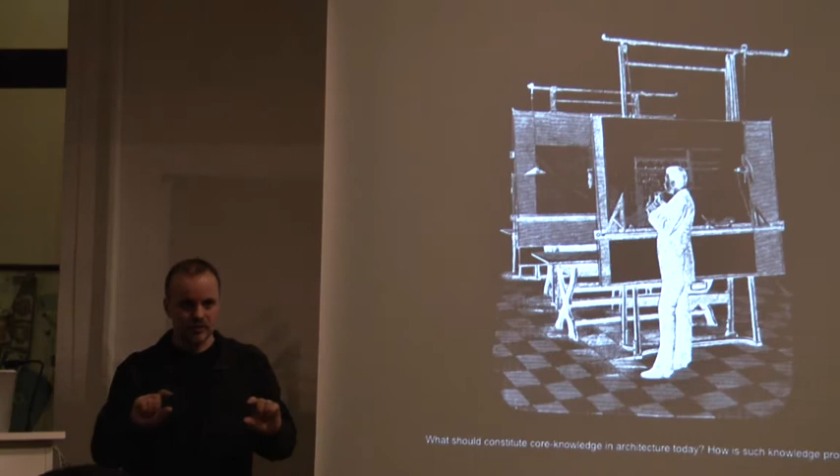All I showed to you today is part of that integrated effort that I tried to show you with the publication streams, where one theme is elaborated from one publication to the next, and maybe split and become several themes at once. So is that a way out of the several crises that architecture is facing at the moment? I don't know, but it would make architecture a little more interesting. Thank you.